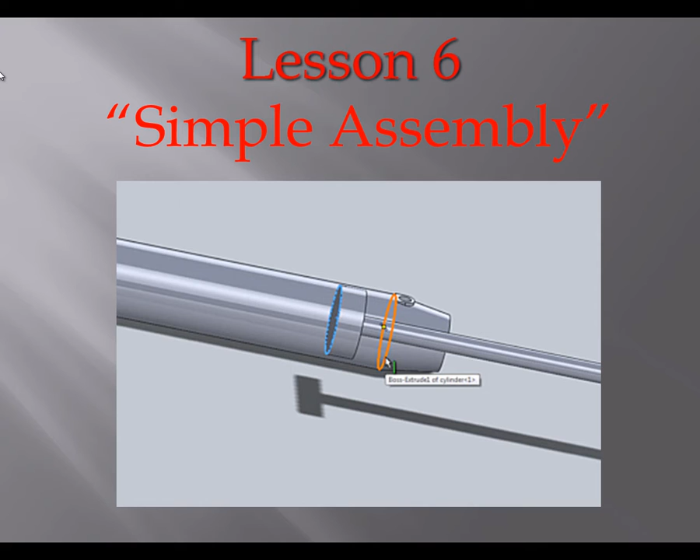In this video, we will discover how to assemble the parts you've just drawn into a working hydraulic cylinder model.

Okay, now we can create an assembly of our part. We're going to come up here for our simple hydraulic cylinder. We're going to come up and grab a new part, grab an assembly, and it'll open us up usually with this page, or this part here. And that's under insert component if it's not there. And we're going to browse,

and you're going to go through and you're going to find all your end caps and your cylinder and shaft, and we're going to put them in there. So with the first part you insert, I'll insert one of my caps first. I want to click on the green check mark. Now this will line up the end cap's origin with the origin of the assembly, and that's what we want.

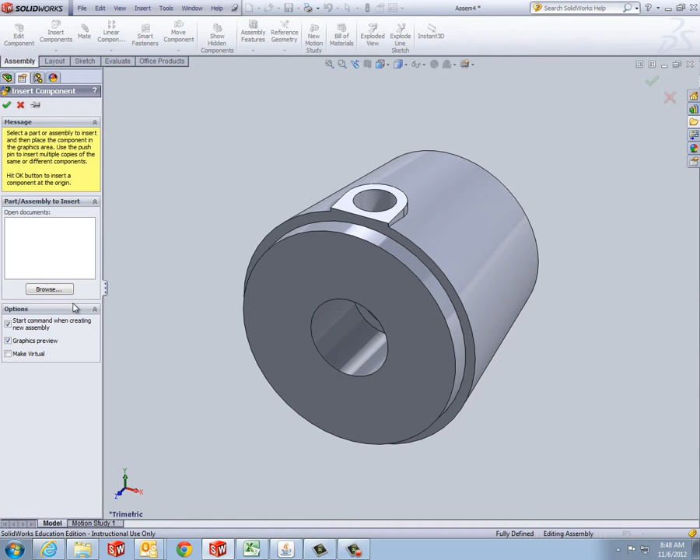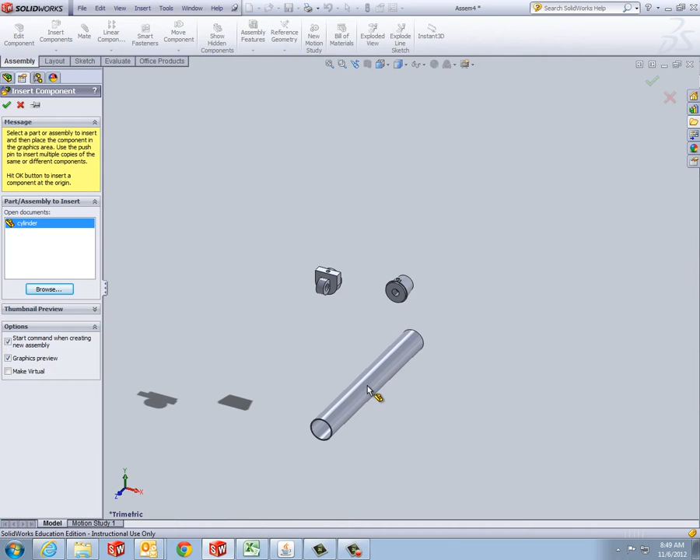So I'll hit the green check mark, and then I'm going to go back to insert component, and I'm going to go to browse, and I'm going to start inserting all my different components. Now these next three you can just place them somewhere. I'm going to try not to place mine in line with this because it'll be easier for when we start mating them together. I'll grab the cylinder, and I'll grab the shaft. And now we're ready to start putting these parts together.

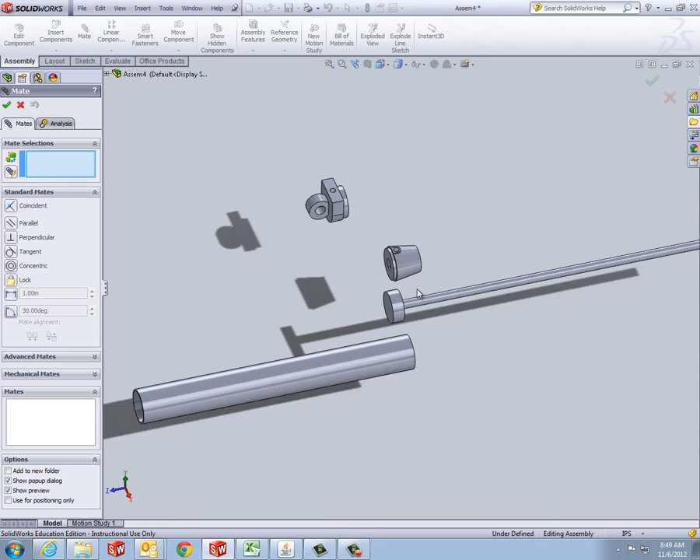What we're going to do is use mate, and if you click on mate, it'll bring you up to a little page here, and we'll be able to start putting these together. And now what I want to do for the first one is, on that first end cap I placed, I want to grab one of the circles on it, and then I want to grab one of the circles on that cylinder, and we want them to be concentric, and we're going to green check mark it.

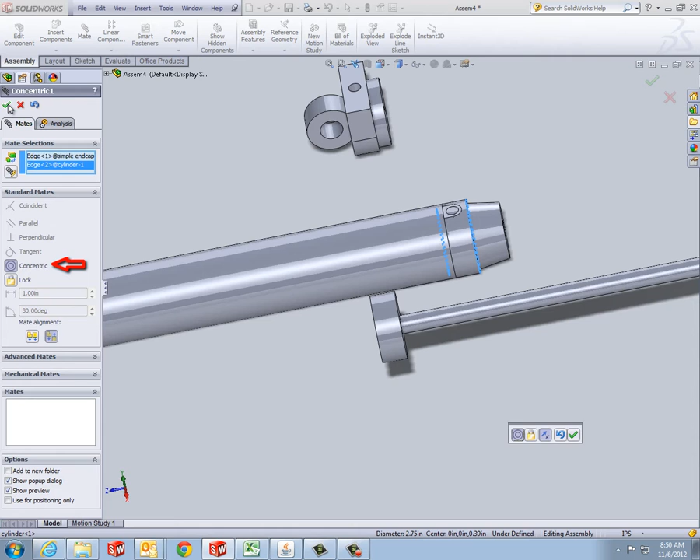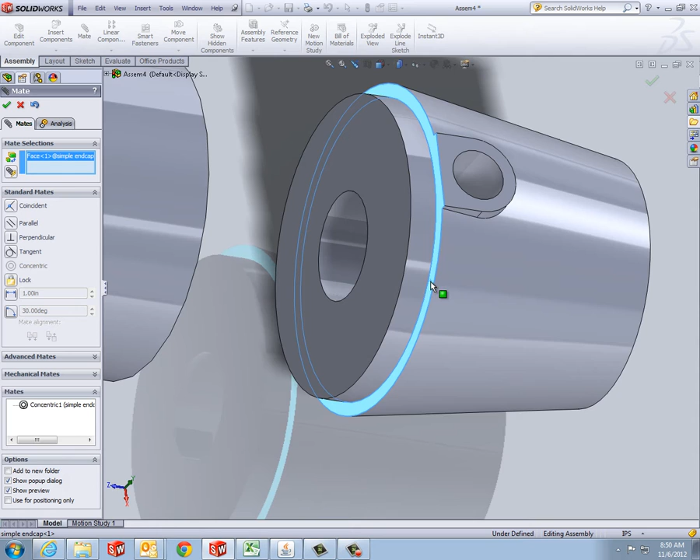Now we're going to line up these faces, so you can actually just click and drag that back out of the way, and it will stay concentric, and that means that those two circles are lined up. And now we're going to grab the face of that, not an edge, it's the face, and we're going to grab the face of that guy, and we're going to make them coincident, and we're going to green check mark that.

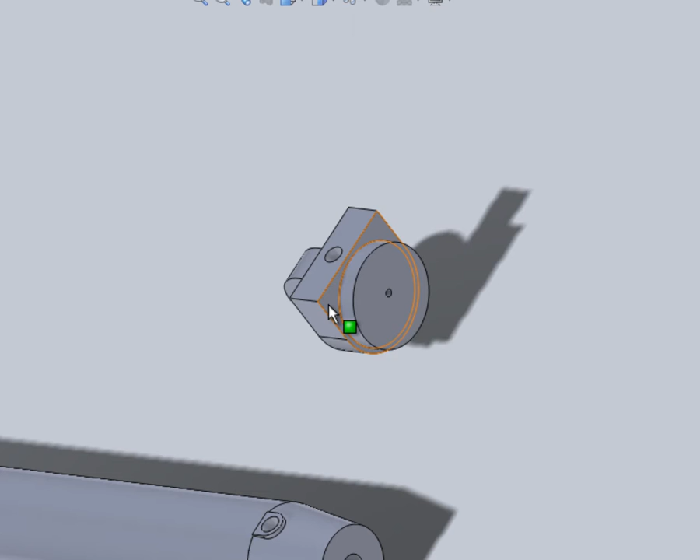And now we're going to do the same thing with this guy, and grab the face first if I want. Grab the face on that end cap, come around, grab the face on that end cap, and it usually auto selects coincident. There's other options, but we want coincident for now. I'll green check mark that.

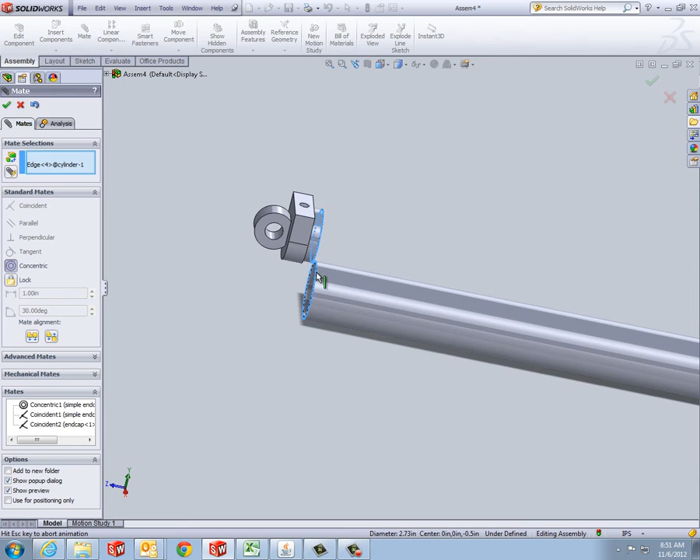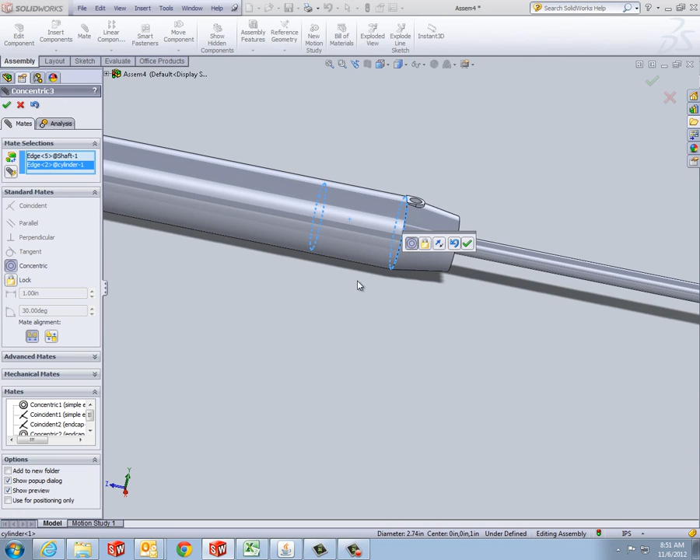Then I'm going to grab a circle on that end cap, on this piece here. I'm going to grab one of the circles on the cylinder and make those concentric. Green check mark. And this one, we'll grab that edge on that guy, and we can grab that circle on the cylinder or the end cap, because we just want to make those concentric. And we don't need to make that coincident at all, because we want to be able to move it, and it will just stay in line with that cylinder.

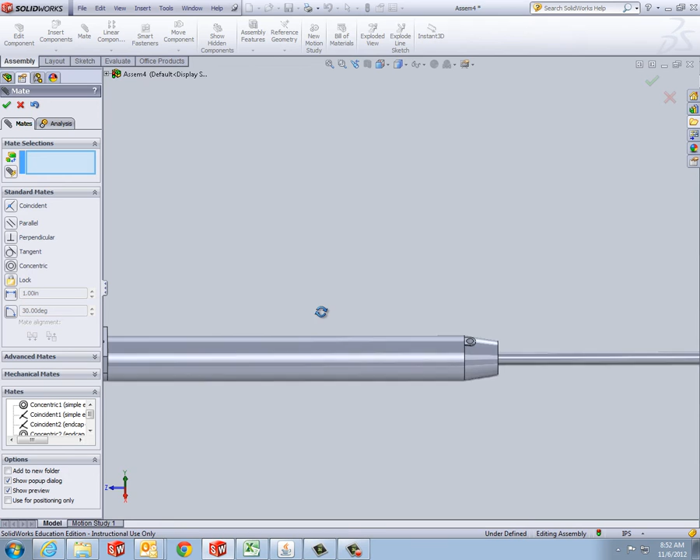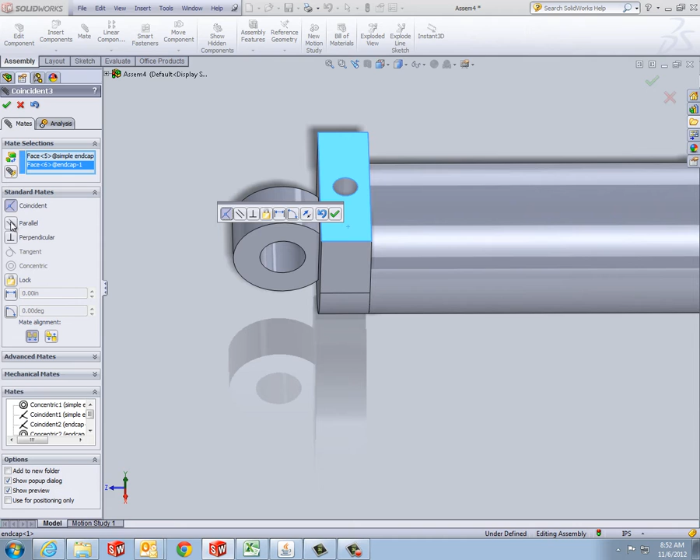And now if your top holes aren't lined up and you want them to be, there's ways to do it. Since the two flat spots on ours are at the same height, for this we can grab this face and that face and make them parallel. As you'll see, if you made them perpendicular, it would turn that one 90 degrees from it. We want them parallel, so we'll accept that. And now our hydraulic cylinder is put together.

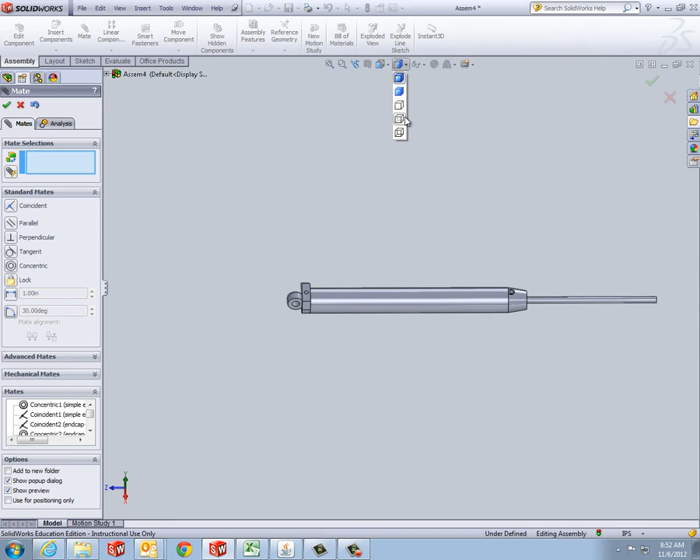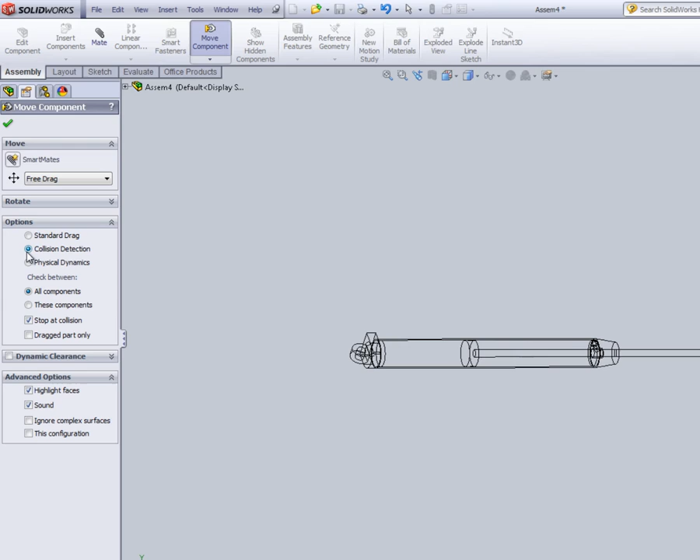Now if you were to turn it into a wireframe, you can see that our shaft's in there. So we can exit out of mates, and now you can do stuff like with your move component, you can test this out, and with free drag you can do collision detection and stop at collision, and then when you drag this shaft it will stop when it hits those end caps.

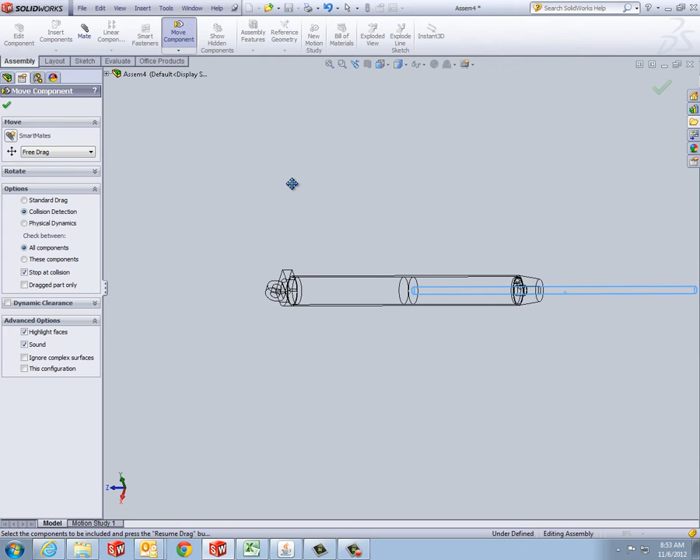It's kind of nice to find out if you made a dimension on one of these parts too small or too big, because sometimes if you do stop on collision it might say it's starting in the collided position, which means one of your dimensions is off. So it's kind of nice to use.

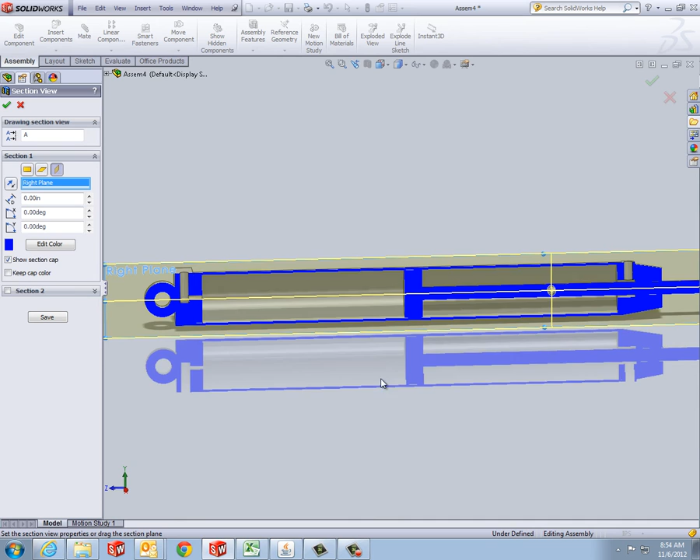You can also do section views of your part, and that just allows you to do a cut into it, and you can see the portholes that we've placed in this end cap, and the same with this one on this side. You can still move your part around.

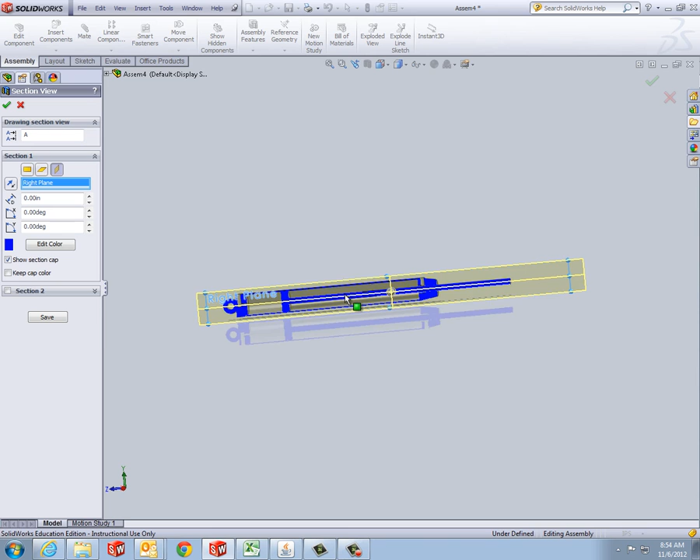And that's it for our assembly. You can just save this as your simple hydraulic cylinder assembly, and that's it.